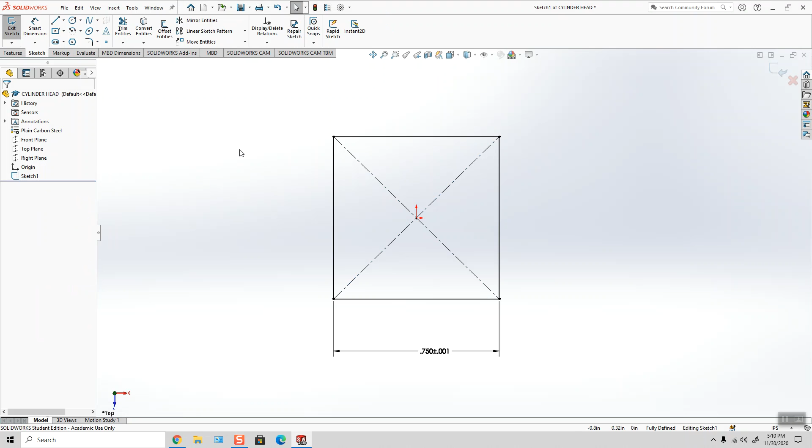What I've done is drawn a 3/4 inch square on the top plane, added my plus and minus tolerance, and I'm going to extrude this to a thickness of 154 thousandths. So 0.154.

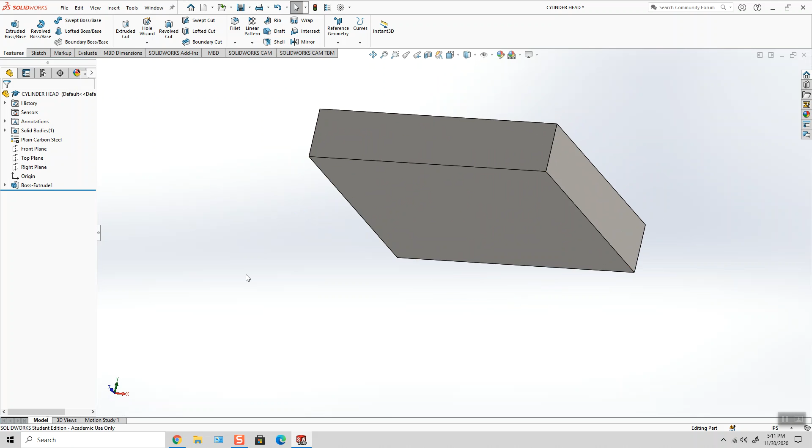Okay, and now I'm going to create that step. It's a circular step that happens, I guess this would be the bottom. So I'm going to go ahead and draw a 0.6 inch diameter circle right on the bottom. And I'm going to cut that down into the part, a shallow amount.

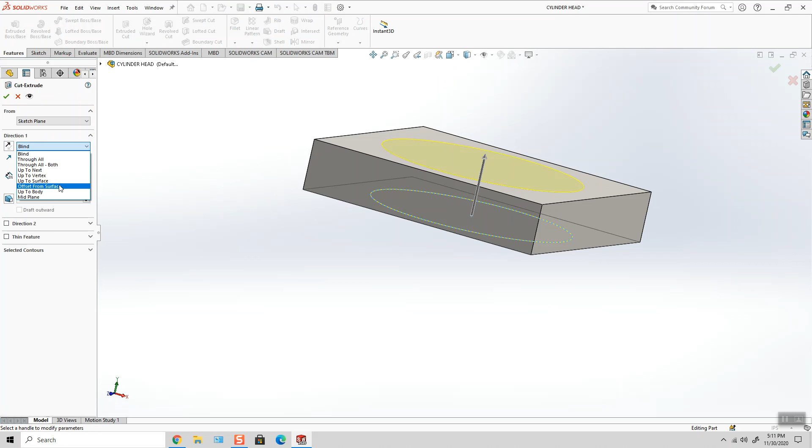But the way it's dimensioned on the print is it's 144 thousandths from this cut surface to the back of the part. So in this instance, instead of blind or mid-plane or up to surface, I want to choose offset from surface. So I went to extrude cut. I'm going to choose offset from surface, and I'm going to choose the surface I want to offset from.

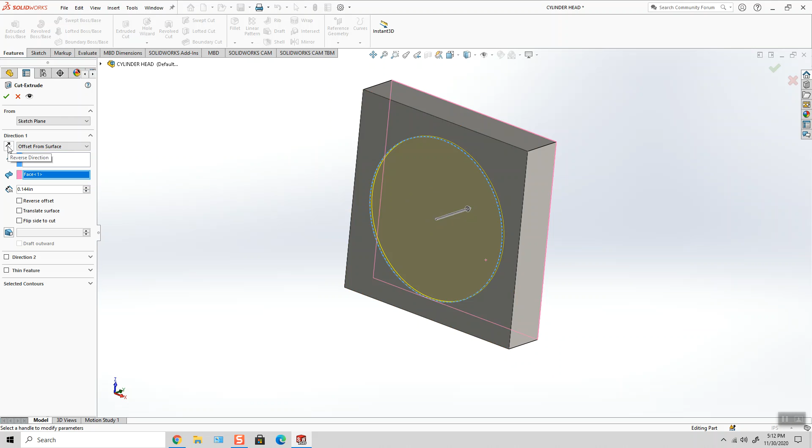So here's my sketch on the front, but I'm offsetting from the back of the part at a distance of 144 thousandths. So it's going to remove all of that material, leaving me 144 thousandths, okay? But I don't want the inside of this circle to be removed. I want the outside to remove, so I'm going to hit reverse direction, actually reverse offset, flip side to cut, third time's the charm, and I'm good.

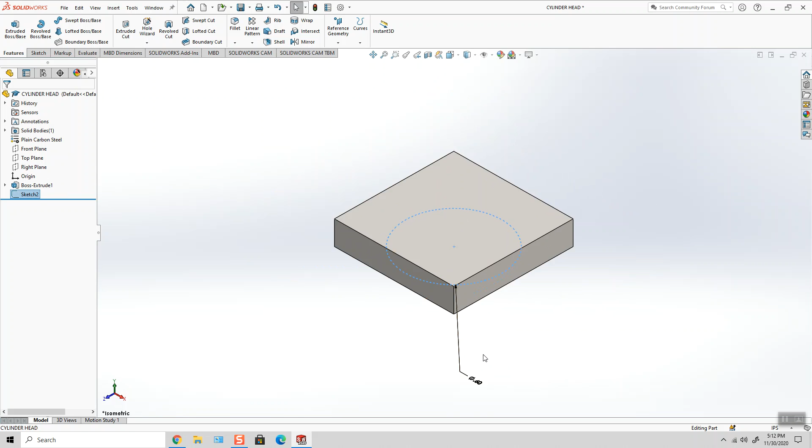Let me back up and kind of say what I just said again. I'm sketching on the bottom of the part, okay? A 600 thousandths diameter circle. I'm going to use extrude cut to take this sketch and cut it into the part, but I want the outside of it to be cut. So I'm going to hit offset from surface, 144 thousandths, and I want flip side to cut.

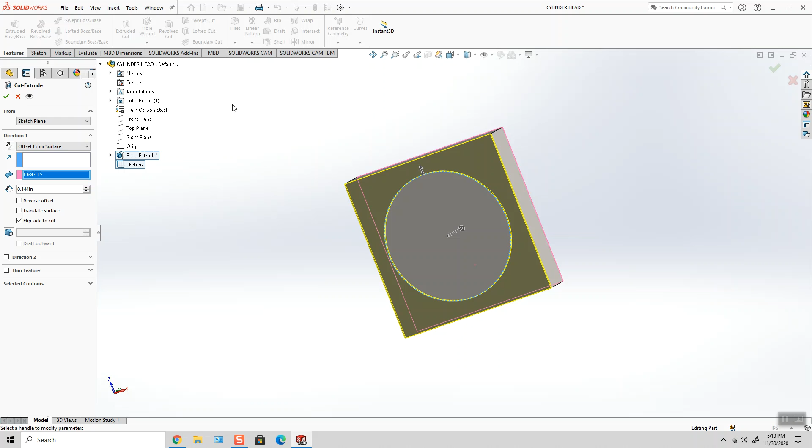What that's going to do is it's taking my circle, or in this case everything outside of the circle it's cutting, and it's leaving me 144 thousandths left. File, save.

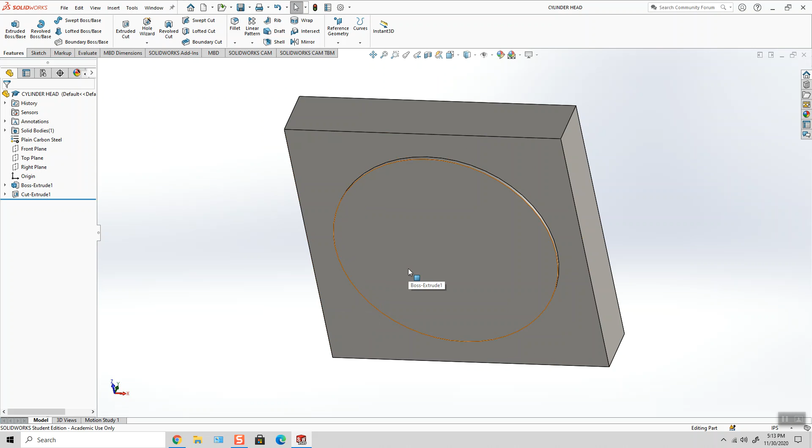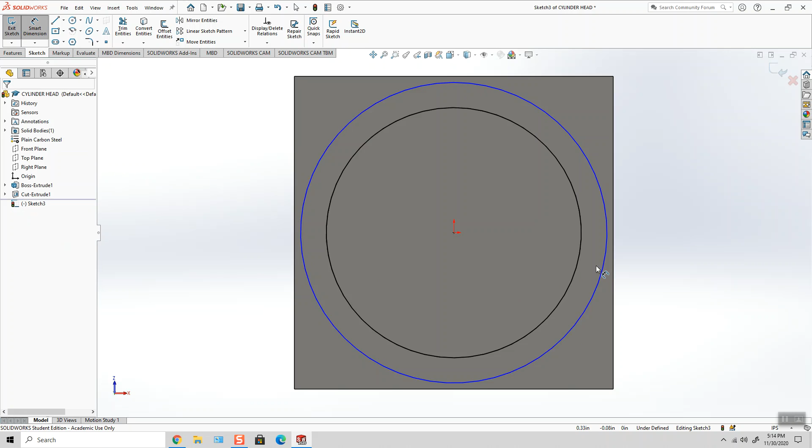which means I made a mistake previously. So let's back up a second. This diameter is not 600 thousandths. It's 0.438. There we go. And this is 0.6. Perfect. And that cut is 0.047.

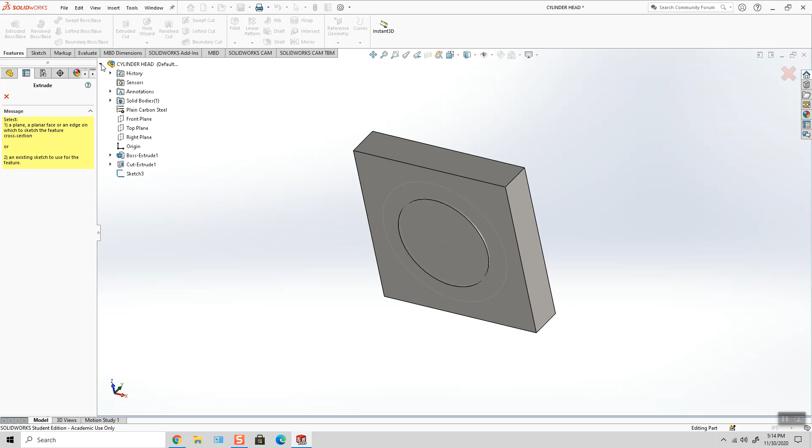And it looks like the cut is coming from the bottom of the part, not from this surface. So a couple of ways to fix this. I can edit my sketch plane. So instead of sketching on this surface, I should have sketched on this surface. But all of these mistakes, easy to fix, and I'm glad you're watching them.

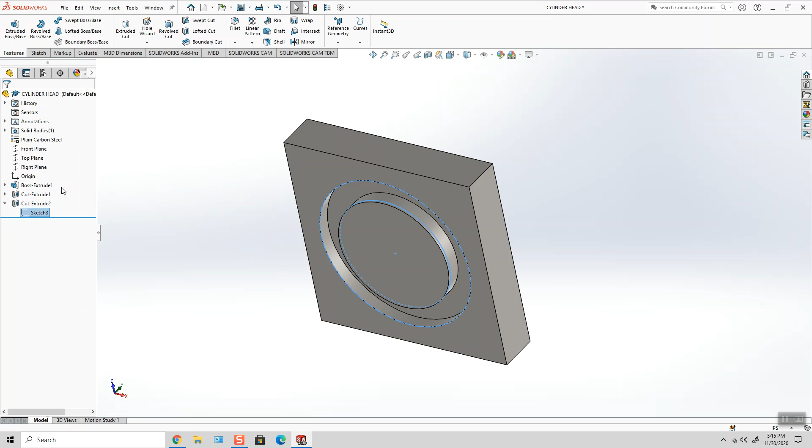So I'm editing the sketch plane, and this was the surface I should have chosen. And now my cut is cutting from the correct depth. Okay, file, save.

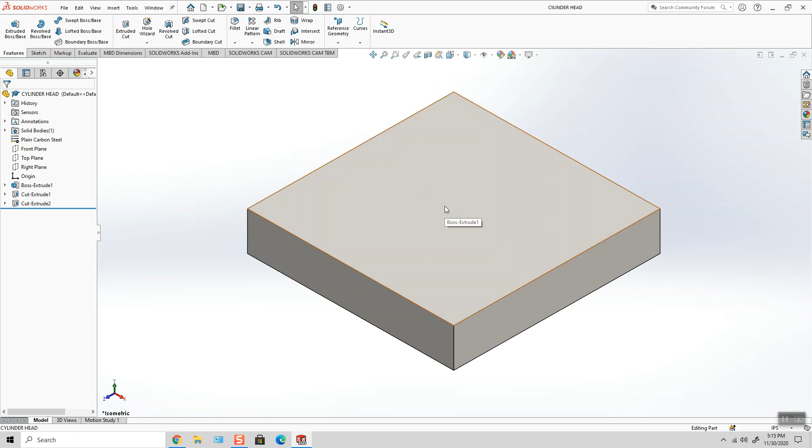Now I'm going to go ahead and add the tapped hole in the center, and this was the one design change that we did. We changed it from a 1/4 inch 32 UNF to an M10 metric thread. So I want to make sure that straight tap is selected. I'm going to switch over to ANSI metric tapped hole, and I'm going to choose M10 by 1 from the list.

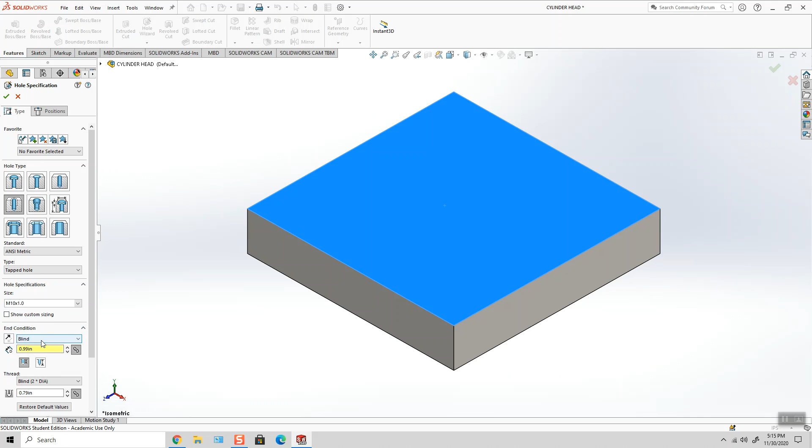And I want to go through all. My position is simple. It's right in the center. File, save.

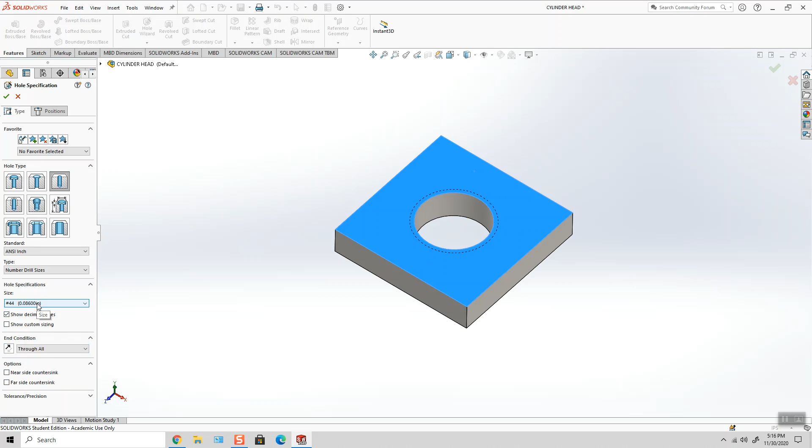Now we're going to add the 4 mounting holes using Hole Wizard. I'm going to switch over to simple hole. We want ANSI inch. We want number drill sizes, and I believe it was number 44 from the list. If you hit show decimal values, it'll show you yes, we're creating a 0.086 inch hole. Our end condition is through all.

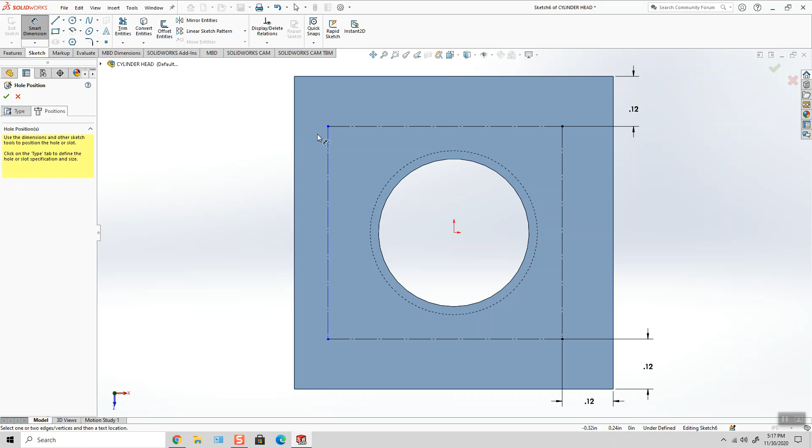I'm going to go ahead and put this center point rectangle. Actually, I'll use a corner point rectangle. Make sure it's for construction. Add my dimensions. And place a point at the corner of each one.

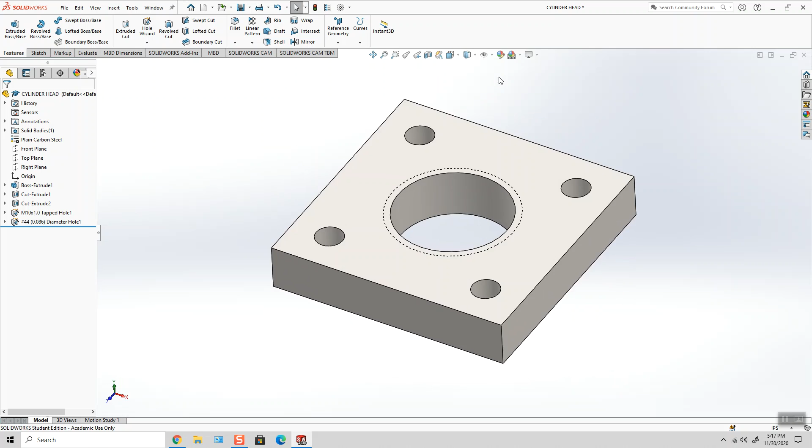So there is the cylinder head. Isometric view, regenerate, make sure you have no negative signs. File, save, and move on to the next part.